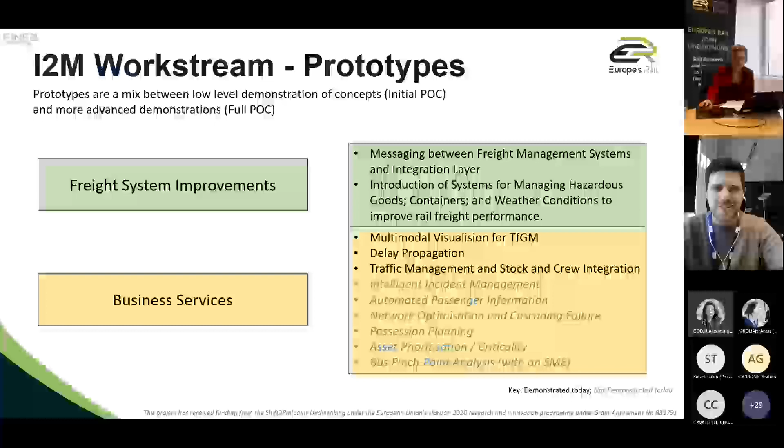So both of these are really focused on how we do reduce energy consumption inside the rail sector. As I said, on the next slide we have the list of prototypes. Those at the top are the ones that the experts will take you through once I finish talking, so I won't go into any detail on those. But the sections below in italics are ones we won't have time to discuss today, but there should be lots of information appearing on our website fairly soon, and there may be other opportunities for us to talk through them. It's worth saying that some of them are also very interesting.

The very bottom one was looking at optimizing the bus network so that passengers who rely on public transport to get to railway hubs can have a quicker and more reliable journey. That's been working with an SME, a small business here in the UK, utilising their expertise with those of Thales.

Other ones have been looking at how we optimize possession planning so that we reduce the amount of downtime. That has a big effect on freight operations and ensures that there's more available train paths for freight carriers. So there's lots of information available, and I hope to get more of that out to those people listening today.

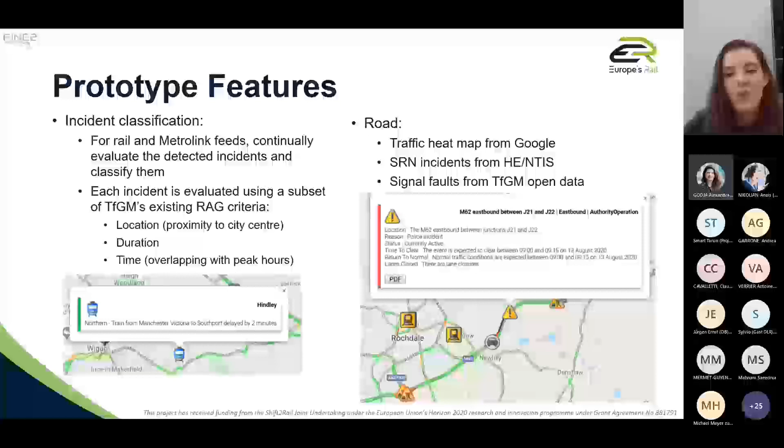For the road network, we created a traffic heat map, pulling in data from Highways England and NTIS, which is the UK road network, and we got some signal faults from Transport for Greater Manchester's Open Data API.

So for the rail, we monitored train departures from our Thales-provided Darwin service, so we could identify which trains were running late and then create train-specific incidents. We could also pull in some of the tram Manchester Metrolink data using Transport for Greater Manchester's existing open data API, so we could identify if there were no arrivals or departures for a tram stop, if the trams were running late above a certain threshold, and if the statuses of the passenger information displays were not updating.

Great, thanks. If we could go on to the next slide.

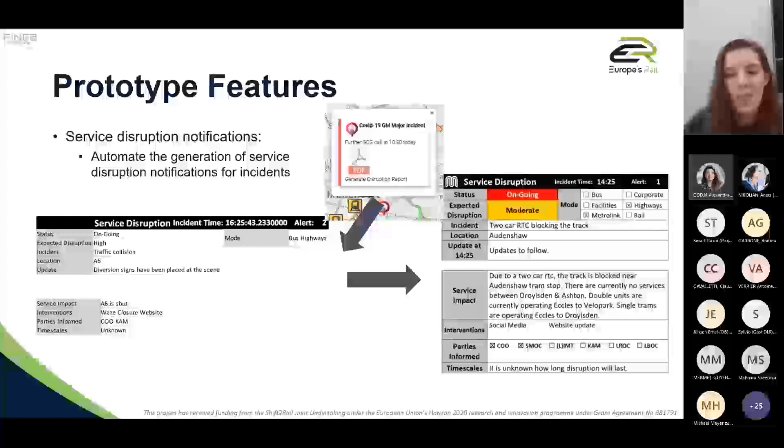We also added some features to further along incidents. So to notify wider management in Transport for Greater Manchester, we created a PDF in their general procedure format for when an incident's ongoing. If the system detected an incident, a user could then quickly generate and raise information and send that on to a wider audience. Here's an example of what our PDF looked like during the proof of concept.

Another apprentice also streamlined the data gathered from the APIs, so it was a lot quicker and faster to get the information, and added events to the feed. So, for example, if a big festival or a big football match was happening, that information could be added and certain roads blocked off or information sent out regarding those events.

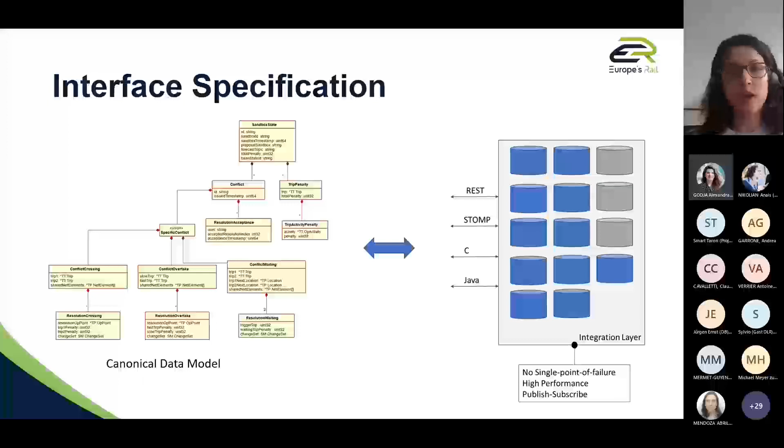A little background on this work: it's essentially joint work or joint activity between the partners. Freight railways often suffer from unpredicted disturbances, which may be caused, for example, by extreme weather conditions. As a result, to control the impact of these disturbances, temporary speed restrictions are put into effect. Currently this process is done manually, resulting in speed restrictions being effective in larger areas or for longer durations than actually needed. Therefore, one of the modules developed in the Fine2 project, the prototype by Thales, dealt with deciding what temporary speed restrictions should really be put in place, and for what duration. Using near-future weather forecasts, these temporary speed restrictions and the area they covered were bound to a shorter duration than what would have been decided manually.

But that's not the end. We need to integrate this information into the forecast calculation to provide a more detailed forecast to the people who will actually use it. This is the subject of the prototype done by Siemens for conflict detection and resolution. As soon as this forecast is available, we need to inform the freight users of the system, or freight management systems, because this would impact their operations significantly, in terms of planning terminal operations, informing customers, and so on.

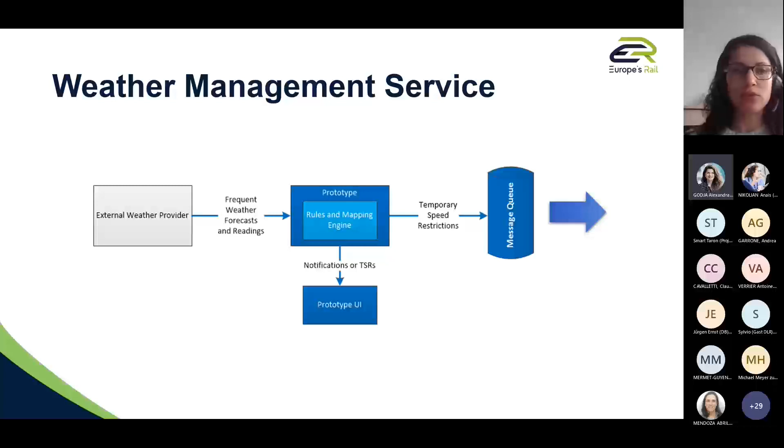Then the conflict management service carries out the conflict detection and resolution and calculates the forecast based on the information it receives. An important feature is that multiple operators can work simultaneously on the same master timetable, concurrently modifying their own small parts of the network to produce a global solution. There could also be a decision support system integrated as an additional player, either alongside a user or operator, or as a master branch. Once the master timetable is decided, it is communicated to the integration layer.

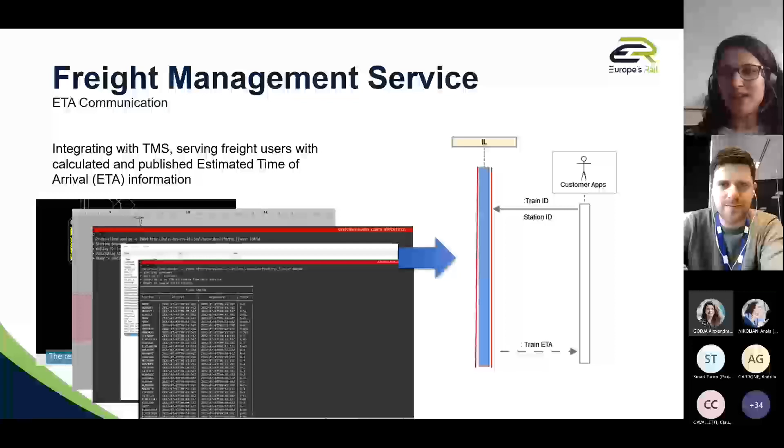So this was basically a very brief, general presentation of the different modules that were developed, and a description of the application programming interface for freight management and conflict detection and resolution integration, and how we can use that to minimize the impact of extreme weather conditions on train operations. This was the presentation, and I would like to thank you very much.

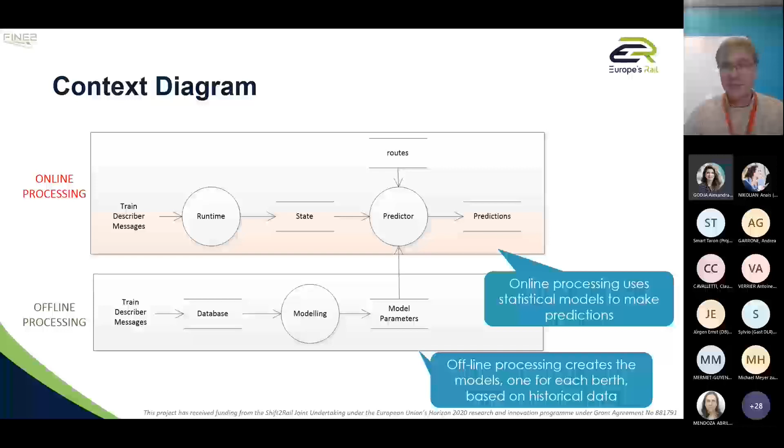Now, thank you very much - context diagram, yes. So we have two parts of our work. We have an offline processing algorithm that takes data from the train describers and computes statistical models for the length of time across each berth. And then we have an online processing part that makes the predictions happen in real time. Next slide, please.

We used something called a generalized linear model, which is a regression technique that uses explanatory variables to control the model parameters, so you can take into account the time of day and the occupancy of the forward berth in making your model.

In order to choose between models, we use something called the Akaike information criterion. We generated lots of candidate models and used the AIC to choose the most appropriate one. It selects a model with the right amount of parameters: if you have a lot of data for a particular berth, you can have a model with lots of parameters; if you haven't got so much data, it's better to have fewer parameters. So you balance the size of the model compared with the size of the data.

That's a method that has roots in information theory. It's quite a deep model.

So what does our model currently know and not know? It currently knows how the speed of a train depends on the signals last seen, and it knows the time of day. Our model doesn't yet know what the schedule is, and that's important because the schedule can be a major driver of the performance behavior of trains on a network.

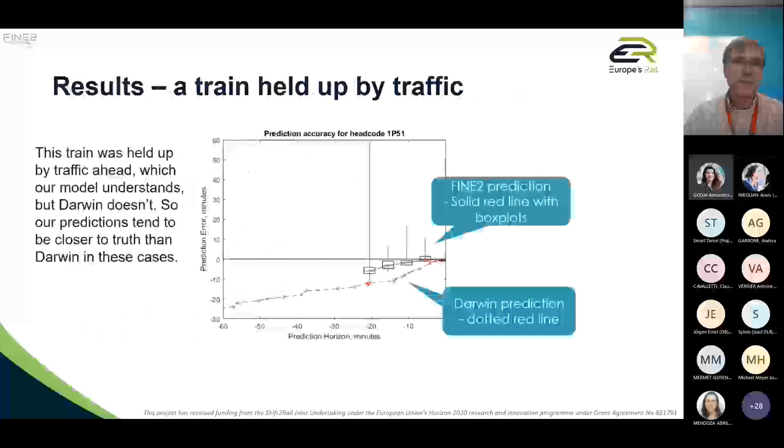So this is an example of our results. On the x-axis we see the prediction horizon in minutes, and on the y-axis we see what the error was at that particular prediction point. The prediction horizon has 0 on the right-hand side because that's when the train got to its destination, and -60 on the left-hand side means you're predicting an hour in advance.

This particular example is for a train on a bad day - clearly that was our interest, finding bad days in the network. This train has been held up by traffic, quite a few trains are bunched up, and our models know how that works. They know that when trains are bunched up ahead of you, the trains won't be able to keep up at their normal speed, so the model takes that into account and gives quite a good prediction.

The FINE2 predictions are the ones in boxes. You can see our first prediction is at 20 minutes before the train gets to its destination, and we converge on the true time from there. The existing Darwin algorithms don't do quite so well because they're not designed to take the interactions between trains into account.

What they do take into account is the schedule. So in a lot of cases, Darwin has an advantage on us, but when the rail network is congested, our FINE2 prediction does a little better - there we have a 6-7 minute improvement in accuracy, and that's worth having.

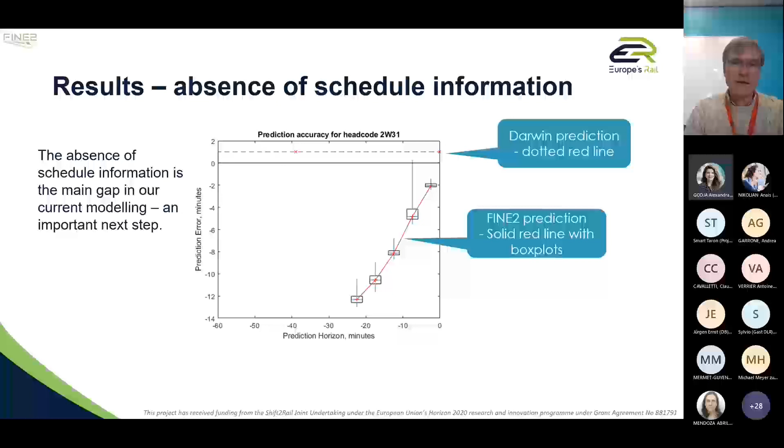So we have conclusions. The results are quite good - we've succeeded in our aim of making a prediction that's better than Darwin when the trains are bunched up. And it's implemented in a way that we can scale it up to full-size operation, because we built on something we've used at Thales before, called a discrete event simulation architecture that can be distributed across multiple machines. So implementation at scale is not really a problem.

And Thales GTS plan to carry on. We've done a proof of concept, and the team now plans to refine the system and begin the process of incorporating that into day-to-day operation with Darwin. If it's successful, that will improve the quality of data for the rail network and for digital planning tools that are also used from the network.

That's all I have. Thank you very much, and I look forward to hearing any questions later on.

Thank you, Steve. I think you actually trimmed a minute off Marnham then, so the gauntlet has been laid. So next up, it is Claudio and Andrea, who represent Hitachi Rail STS over in Italy. I can see one of you has appeared. I think it's Andrea. Yep. So Andrea, I'll hand the baton to you.

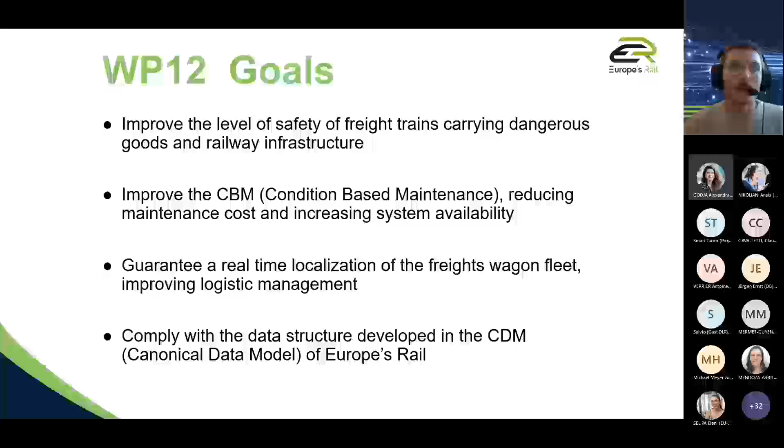FINE2 work package 12 is concerned with developing a prototype for the management of dangerous goods in the railway. The main goals are improving the safety level of freight trains while transporting dangerous goods, reducing maintenance costs and increasing system availability by introducing condition-based maintenance interventions, improving freight trains logistic management, and exploiting the data structure developed in the canonical data model of Europe's Rail.

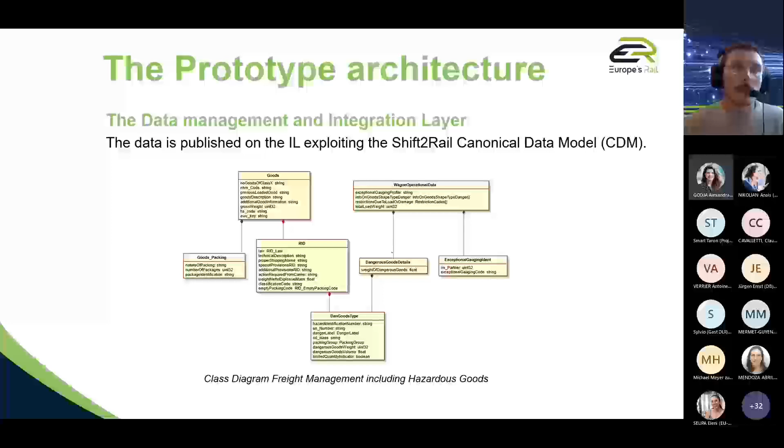The data is published on the integration layer, exploiting the Shift2Rail canonical data model. For this prototype, we developed an integration layer able to manage both CDM STS messages and CDM Shift2Rail messages, which facilitates asynchronous communication among the microservices.

This is the HMI, which is composed of four main sections. The one in the top left shows all alarms received together with a timestamp and alarm type. The one in the top right shows all observations received by the master control unit and acquired by the sensors. These sections highlight possible anomalies with different colors and allow the user to click on a specific observation and see the message in the Shift2Rail CDM format. The third section, in the bottom left corner, shows the train's path in real time from the origin station to the destination station. Finally, the last section shows the timetable graph highlighting the scheduled and actual timetable.

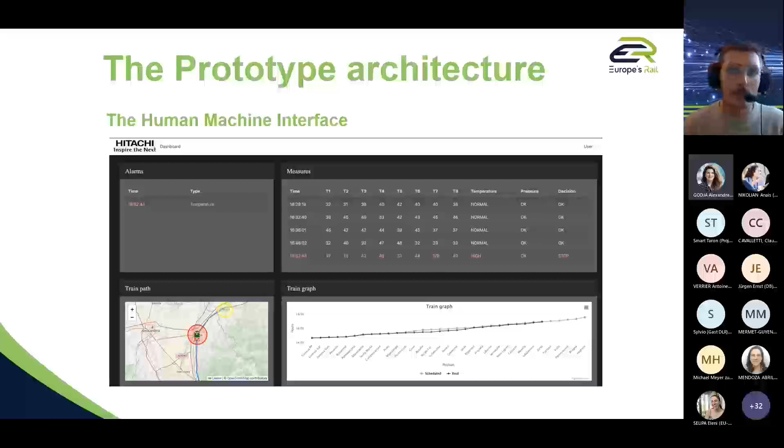The following slides show the main use cases that prove how the objectives have been achieved. This is the first use case in which an axle box temperature alarm arises. The onboard control unit sends the alarm to the TMS, which sends a message to the train ordering it to stop in order to avoid possible damage or derailment. This use case demonstrates how the use of the prototype can improve the safety level of freight trains carrying dangerous goods.

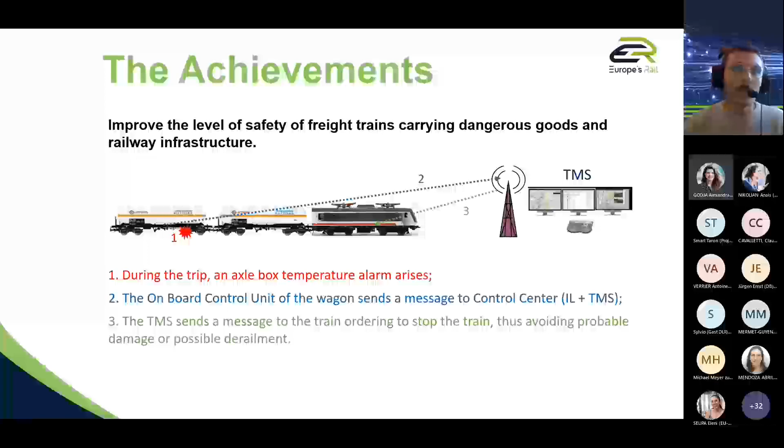For what concerns the objective related to improving logistic management, the developed prototype can guarantee the continuous transmission of the GPS signal of each wagon, providing real-time localization of the freight wagon fleet.

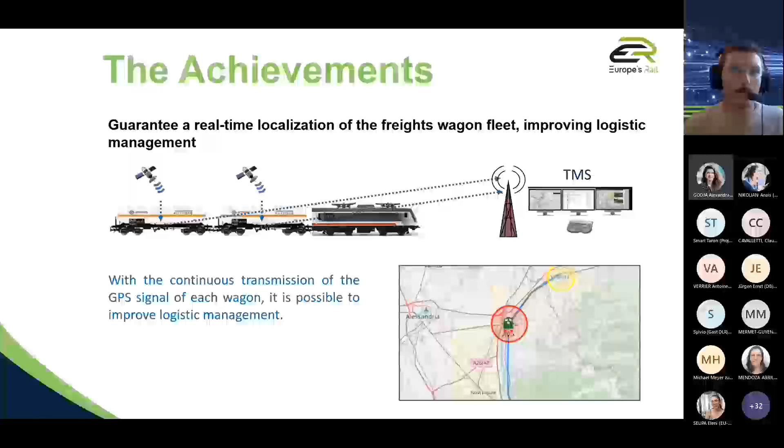Finally, we are compliant with the data structure developed in the canonical data model of Europe's Rail. As already said, we developed an integration layer that can manage both CDM STS and CDM Shift2Rail messages, and can easily manage the communication among the subsystems.

To conclude, the prototype developed within WP12 is able to minimize the risk of accidents during freight train transportation. It can also monitor different parameters, for example axle box temperature, making it possible to introduce condition-based maintenance interventions. It also provides GPS localization, useful for managing freight train logistics. It publishes data on the integration layer, which ensures future compatibility with other partners.

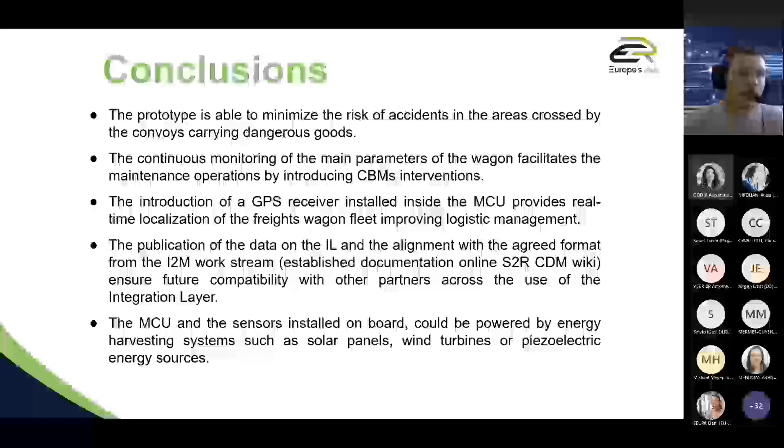An important energy saving aspect is that the power consumption of the devices composing the prototype, the master control unit and the sensors, is relatively low, meaning they could be powered by energy harvesting systems such as solar panels or piezoelectric energy sources. This is a quite good aspect for energy saving.

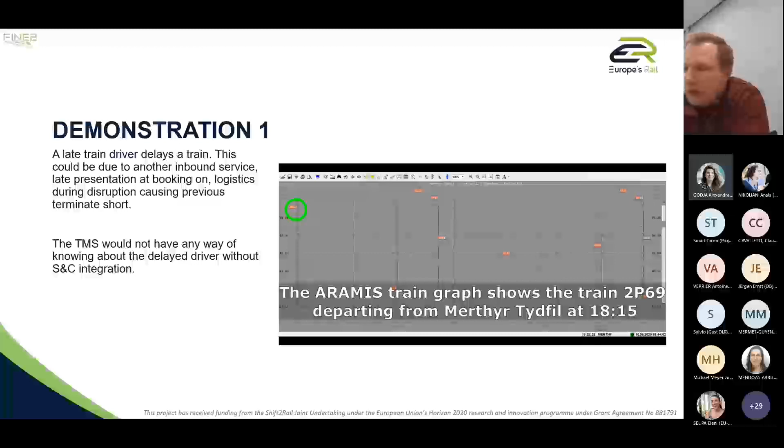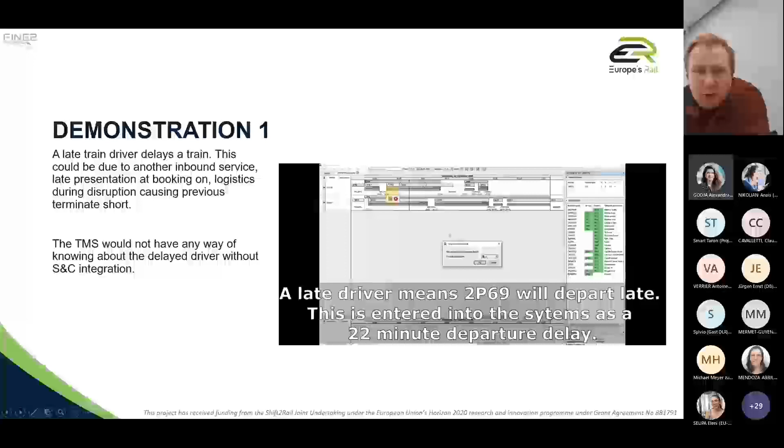If I can ask you to click start on the video, we really will be testing the technology now. Here we go, I think it's going. This is the first scenario, which is essentially entirely isolated to the traffic management system to begin with. We have a crew constraint, and the TM system would have no way of knowing about this. So here we can see how IVU can identify this constraint and update traffic management based on the shared data model, which is train forecasting in simplest terms. Hopefully you're going to see all the magic happen in front of you. I apologize if that's not quite big enough.

This will show how distributed tools can work together.

Providing a common vision, you can see here that Aramis has received an update. There it is.

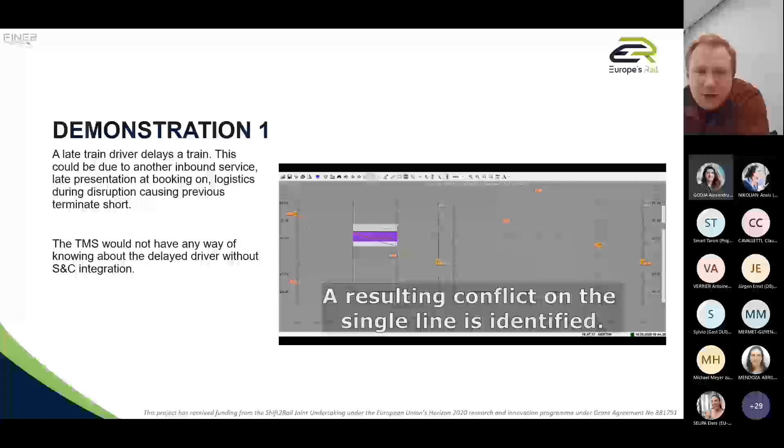And then the traffic management system can act to do what a traffic management system needs to do and resolve the conflict. That information can be reflected back into IVU, and the stock and crew can reforecast or reschedule as required based on the optimal solution.

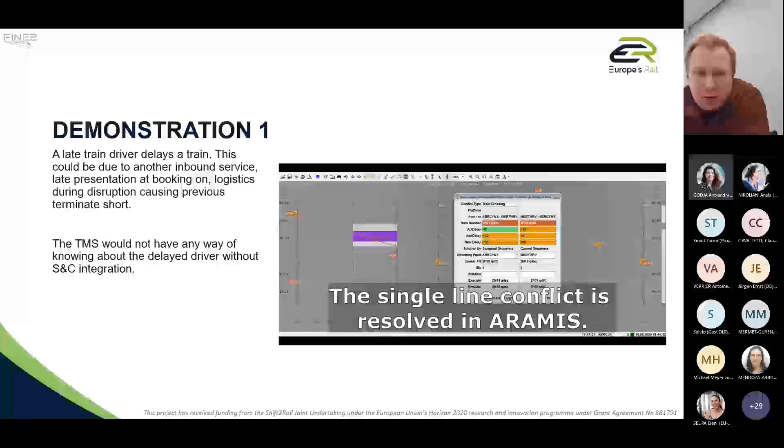This is also quite a good advert for our traffic management system. As you can see here, the smaller purple boxes show basically a progressively reducing conflict, based on the operational tolerances built into the network.

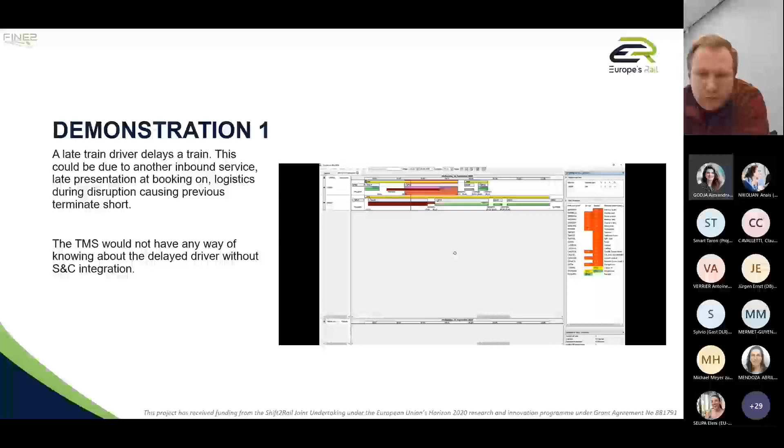Spot the theme: message passing back and forth.

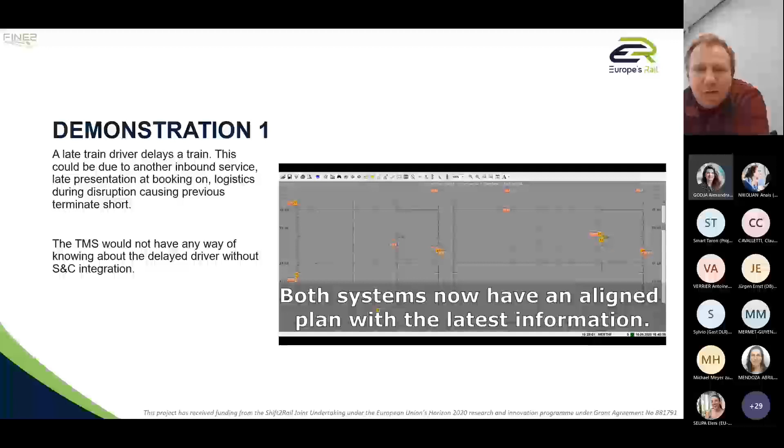You can see now that we've resolved the situation in both systems, and each system has only needed knowledge derived from its own world. So you can protect those things that need to remain proprietary, without exchanging masses of data that's not relevant to other systems. If we go to the next slide, please.

If you could click play again - a very similar model here. In this case, the constraint is derived from the trackside infrastructure as opposed to the stock and crew.

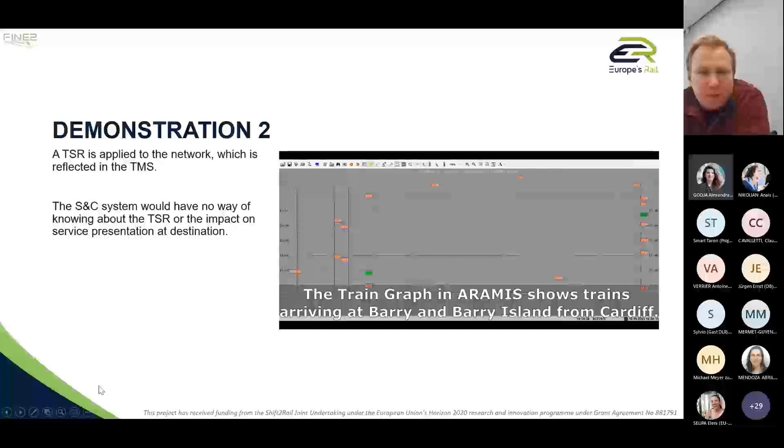Using this common forecasting model, we can supply this information to the stock and crew system. The stock and crew system can use that to identify problems in its ability to resource that plan.

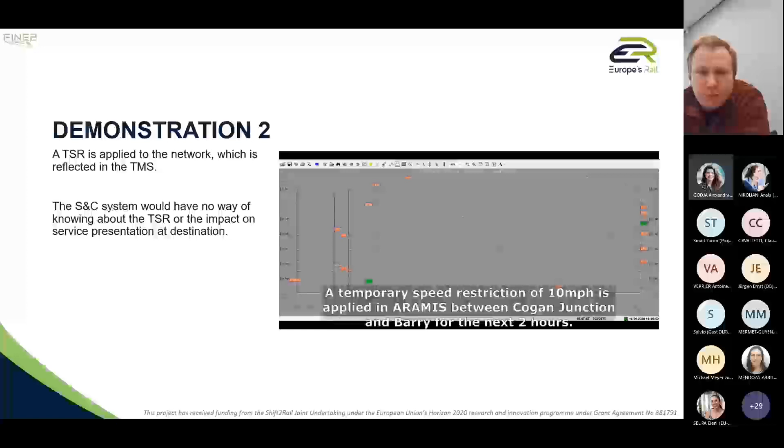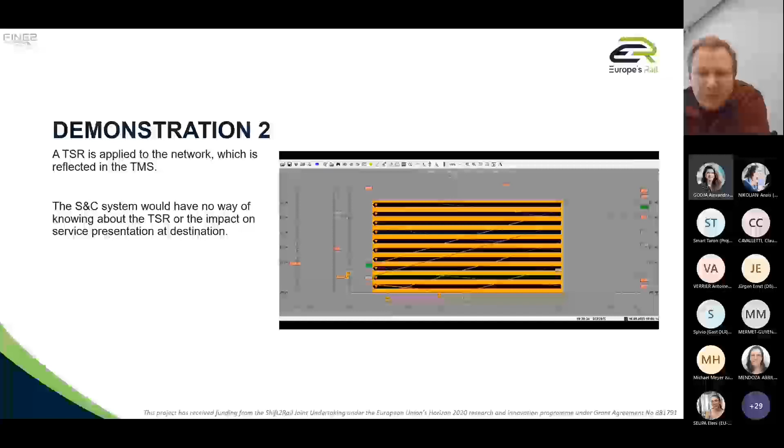One of the nice things about this example is we can see the way this can scale up from individual train-related events to something derived from a trackside infrastructure constraint - for instance, knocking out a temporary speed restriction that affects multiple trains - and how that can quickly be conveyed to downstream systems to which that information is relevant.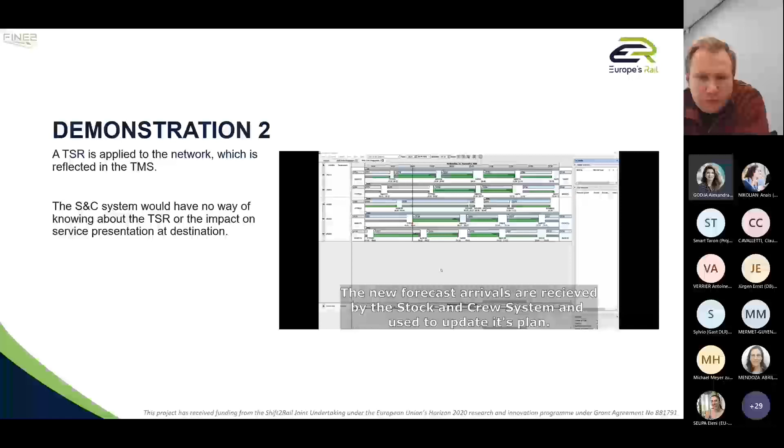You can see pretty quickly what a catastrophic effect that can have, and it allows the operator to essentially start responding to events at scale, as opposed to having to manage this sequentially.

I think that might be the end of that video, so if we move on to the next slide. It's the same slide - there we go, magic. Yep, if I could ask you to click play on that one.

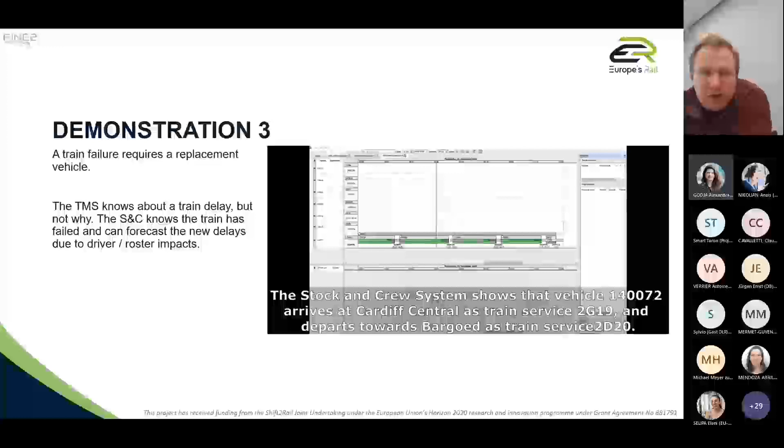This is where we've got inputs into both systems happening at the same time. The traffic management system will observe a failed train, the stock and crew system will observe a failed train, and those different effects need to be integrated into a coherent picture.

This allows the systems to swap information based on that common understanding provided by forecasting, to understand the impact on the train plan.

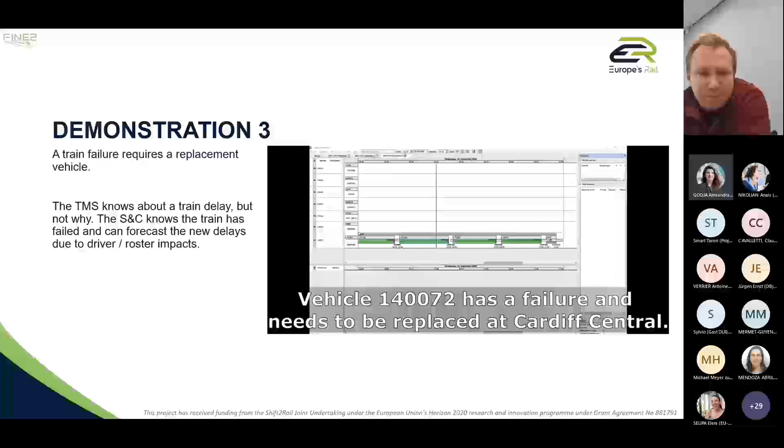One of the nice things highlighted there is very application-specific constraints being applied - so a deployment restriction in the stock and crew terminology, and in terms of how it responds to that, is not particularly relevant to the traffic management system. It doesn't need to see the workings; it only needs to see the outcomes.

So we can see how we can make interoperability commercially viable, allowing people to protect their own IPR and the unique capabilities that different suppliers can bring, while still working together collaboratively to deliver the railway.

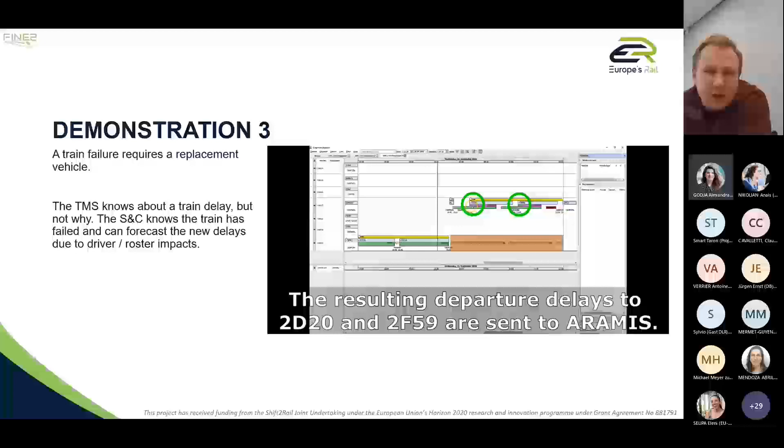The traffic management system would have really no way of knowing that a spare vehicle was available and switched off in a siding nearby, whereas this is available in the stock and crew system.

So we can see how the train plan can be updated based on entirely new vehicles, which is not within the scope of the service plan.

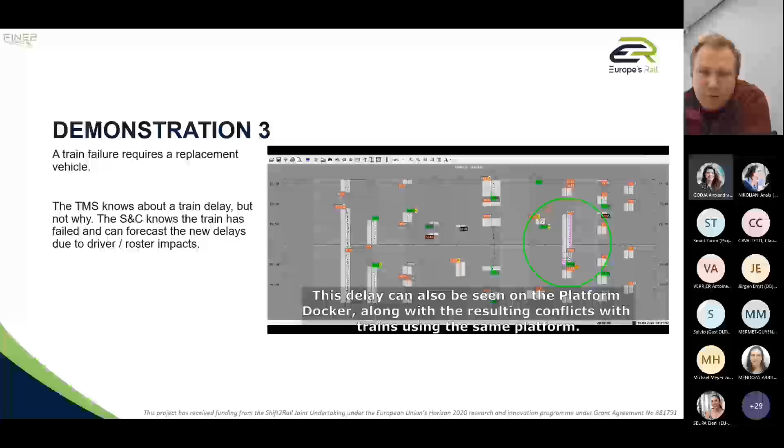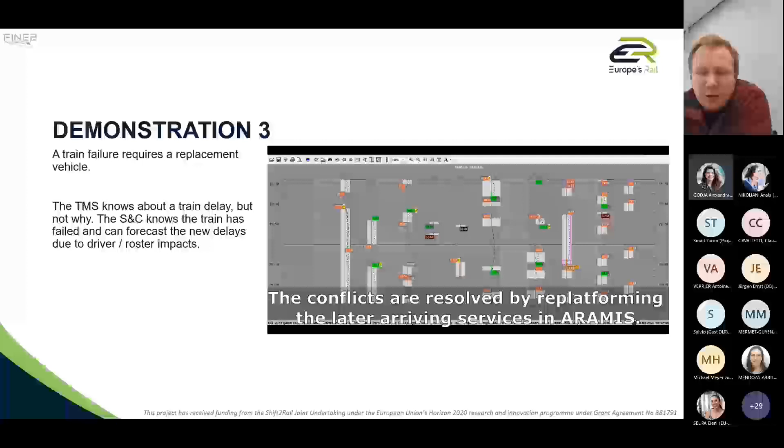We can see now how the introduction of that new vehicle creates demands on the track infrastructure in terms of bringing it into service, and the traffic management system can now usefully resolve that.

I think that's the conclusion of that video, so if you'd like to go to the final slide.

Hopefully you've enjoyed those demonstrations. We've shown how common messaging can integrate disparate systems efficiently, using simple and common APIs as the most efficient way of achieving this. Although we did not use the CDM model, this clearly shows its applicability.

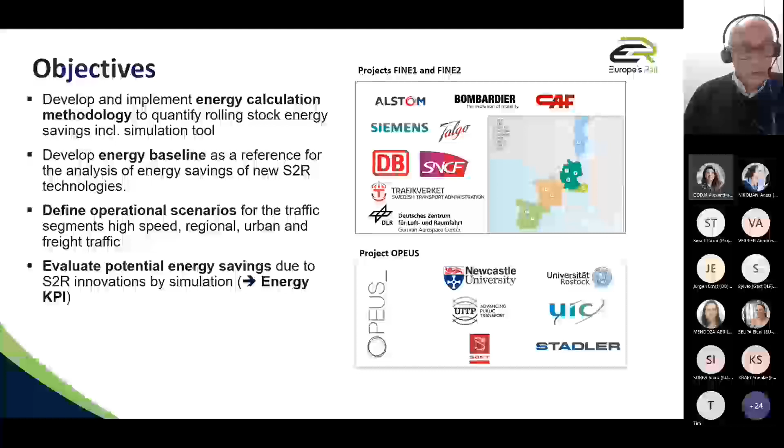The second objective is to set an energy baseline as a reference for all system platform demonstrators in the high speed, regional, urban, and freight segments. The third objective is for every SPD to define operational scenarios to calculate the energy KPIs. Main energy KPIs are train energy consumption per kilometer, and for passenger trains, energy consumption per kilometer passenger, and for freight trains, energy consumption per kilometer and tons. The fourth objective is then, by injecting the improved characteristics of the product demonstrators of Shift2Rail into OPEUS, to calculate the energy saving versus the reference baseline.

Next slide, please. I will present the energy calculation and simulation methodology. Then Jürgen will present our estimation of energy savings due to Shift2Rail innovation. Then Sylvio will give a view on innovative solutions to save HVAC energy in BEMU. HVAC is heating, ventilation, and air conditioning. BEMU is a battery electrical multiple unit. And Jürgen will conclude with an outlook on additional savings foreseen in EU Rail flagship projects.

Next slide, please. So the methodology to compare energy saving is to define for every SPD an equal service profile, and define the classic traction system, for instance IGBT converter and induction motor, versus the future technologies, for instance SiC converter and high-speed axial flux motor, and by simulation with OPEUS, quantify the savings, assuming of course that the technical improvements reported by the TDs are applied.

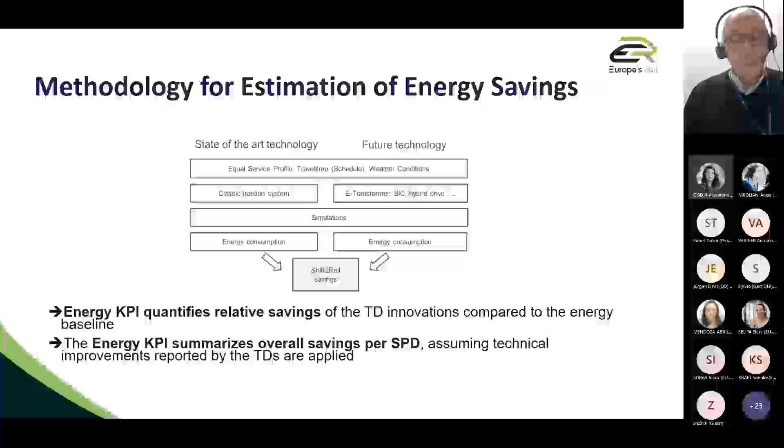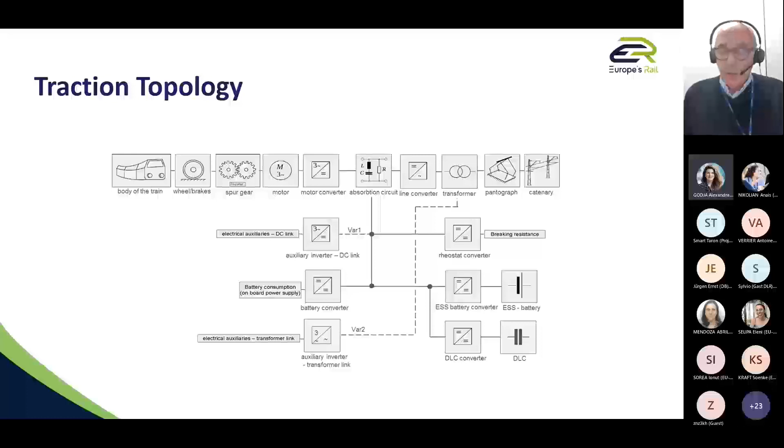The traction topology for EMUs is globally defined for the full train and divided into power subsystems or power components, with a central part shown here as the absorption circuit. Another naming for this part is DC link or DC bus. On this DC link, the main loads are traction equipment, auxiliaries, and rheostat for braking energy dissipation. The source here is catenary, and in this topology we have an energy storage system with battery or supercapacitor. For a demand in power at wheel and auxiliaries, OPEUS tool calculates the energy flows between these elements. Energy flow is the power, in fact.

All that I have explained before is implemented in OPEUS tool. Track data, train data, and operation data are entered with an Excel interface, and the output, the results of the simulation, are also in Excel format. The simulation structure is implemented in MATLAB and Simulink, as well as the component model library.

In FINE 2, we calculate the global energy saving at train level with the new technologies developed in Shift2Rail. Many of these technologies and their implementation are confidential, as required by the partners. That is why I want to illustrate with some concrete examples the potential for energy savings.

First, energy consumption of rolling stock can be divided into three main parts. The first is energy at wheels, which makes the train moving, mainly coming from resistance to motion forces. The second is energy losses in all the power subsystems or power components. And the third is the energy consumed by auxiliaries. There are two types of auxiliary load: medium voltage auxiliaries and low voltage auxiliaries. The main consumer loads are air compressors for brakes, HVAC, and cooling devices for traction equipment.

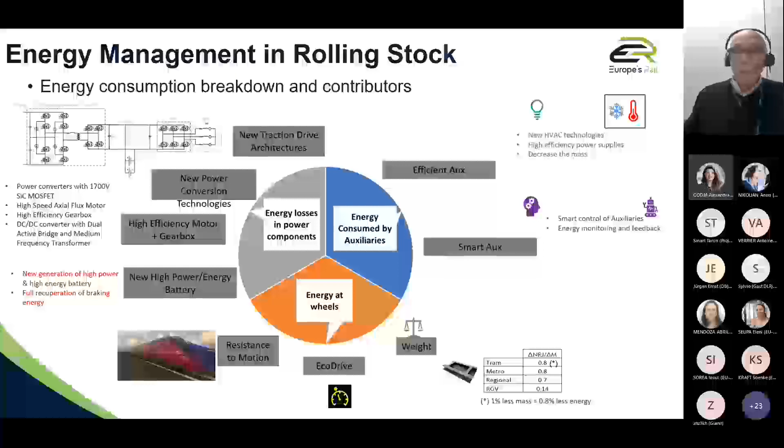So this is just an overview. Now I will let Jürgen go on with energy saving due to Shift2Rail innovation. Please, Jürgen.

Hello everybody, my name is Jürgen Ernst. I'm an electrical engineer and I've been working for Deutsche Bahn for more than 25 years. My main subject is the overall railway system, so I'm not an expert in a special subsystem - I look at the overall railway system from an operator and infrastructure manager view.

So now we start with energy savings due to Shift2Rail innovations. As Michelle already explained, there are four measures to reduce energy. The first is reducing energy losses of the traction chain. The second is reduced mass. The third is improved control strategy and operation. And last but not least, improved aerodynamics.

And now here you see technical demonstrators developed in Shift2Rail and how they contribute to energy saving. These first ones in this slide are only demonstrators for passenger trains.

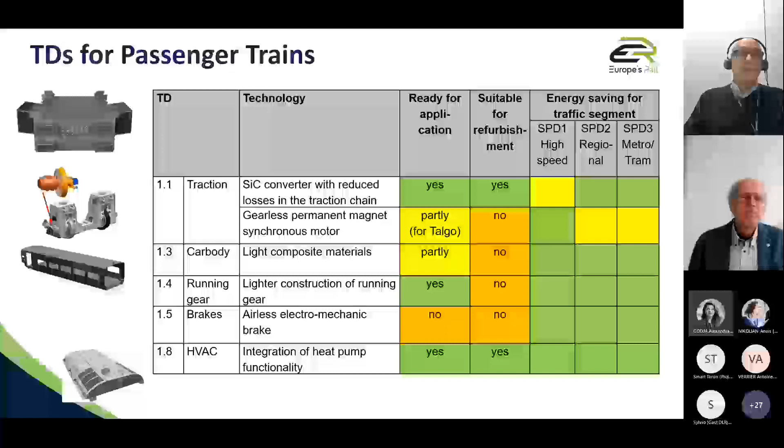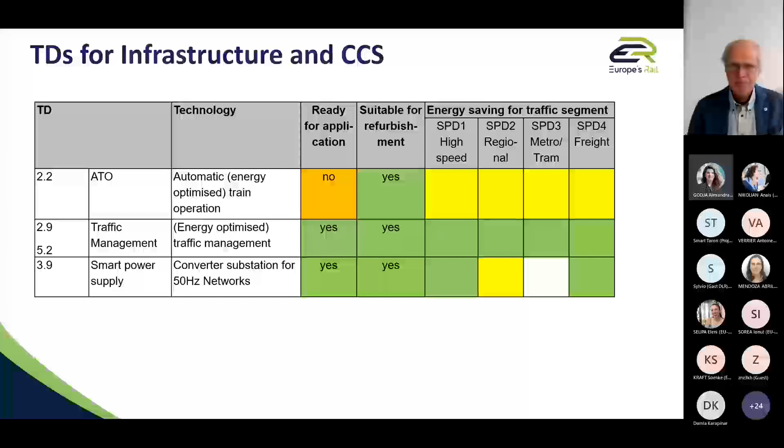And now to the next slide.

And for freight trains, connected driver systems has a low impact, as does the silicon carbide converter. But you see the extended market wagon with improved aerodynamics and the optimized container sequence has a huge impact on energy saving. So it's really important to look at these innovations.

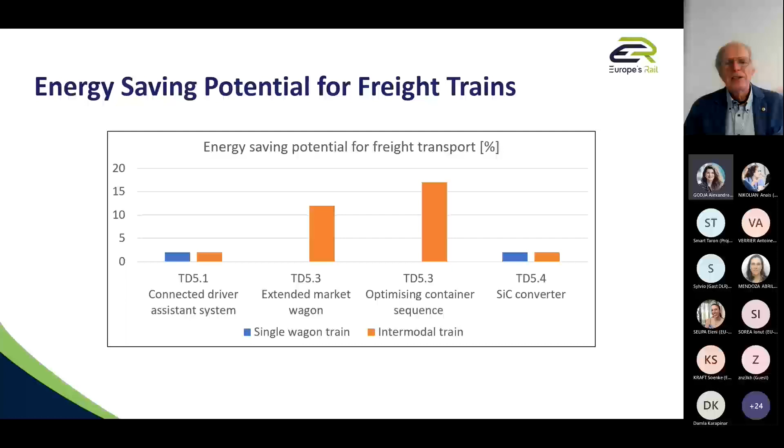Now I come to the conclusions. You've learned that several energy-saving technologies are developed in Shift2Rail, and the technologies suitable for refurbishment can reduce short-term energy consumption by 4 to 20%, depending on the traffic segment. These are, for example, the silicon carbide converter, the connected driver assistance system, ATO, and optimized container sequence.

And with new trains, the long-term energy consumption can be reduced by a further 4 to 30%. For some technologies, the energy saving potential still has to be estimated, for example for substations with converters. So thank you very much for your interest.

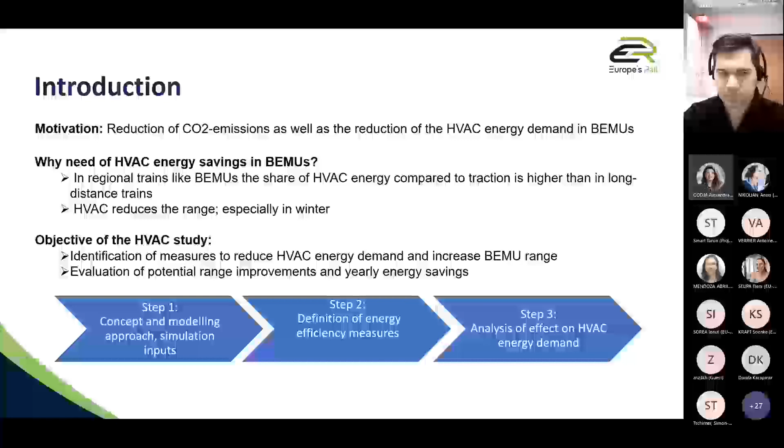Next slide, please. The overall concept is to combine the OPEUS tool, already shown for the longitudinal dynamics, with the DLR model for the thermodynamics of a car body. The approach is iterative: results from one tool are used as inputs for the other, and so on. The whole procedure is based on the norm EN 50591.

Next slide, please. The car body model is described as a regional battery electric multiple unit car body through various wall and window elements, passenger model, etc. This model has been validated in Fine2 task 4.2. The results are shown in deliverable 4.2.

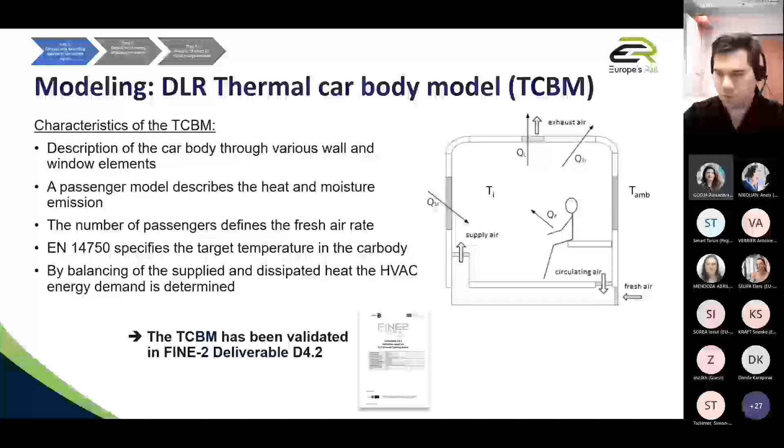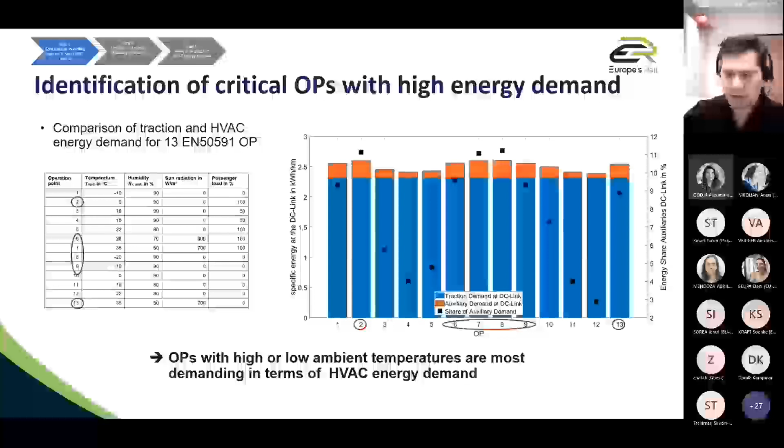Next slide, please. The BEMU baseline is defined with the heat pump, because it's expected that all future BEMUs will have heat pumps instead of conventional HVAC systems. The study evaluates the higher demand of a conventional solution with resistance heating to demonstrate why heat pumps are regarded as state-of-the-art for all future BEMUs.

Next slide, please. The measures and main concepts to reduce energy demand are: measure 1, heat storage, where the heating energy demand is provided by a thermal storage instead of using electric energy from the battery. Measure 2 is the improvement of insulation, which lowers the heat losses through the car body walls. And last but not least, measure 3, the reduction of the HVAC energy demand by utilization of the full temperature range of the EN 14750.

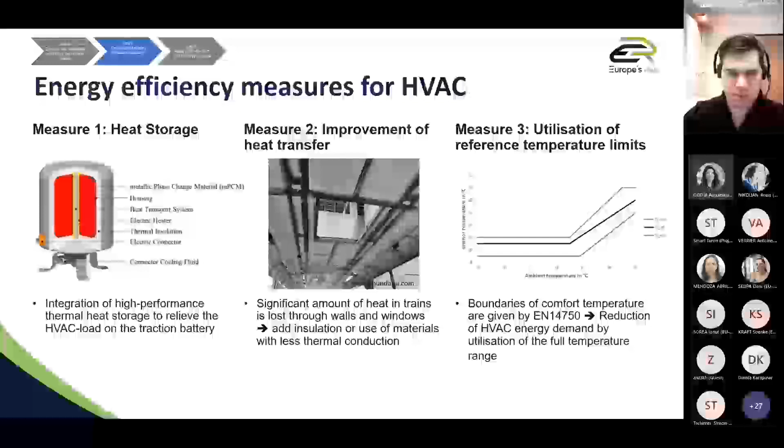And now we want to come to results. Yes, the main results in terms of additional range for each operation point are...

At first, the heat storage is very effective in heating operation points, but ineffective in cooling operation points. The heat storage provides a maximum of more than 9% range increase in some operation points.

The second result is that the improved heat transfer and utilization of full temperature range are effective in heating and cooling operation points. For measure 2, maximum range increase is slightly more than 2.5%, and for measure 3, the maximum range increase is slightly more than 1.7%.

To compare and benchmark the different measures, the yearly energy savings compared to the BEMU baseline with heat pump have been calculated for climate zone 2, according again to EN 50591. Next slide.

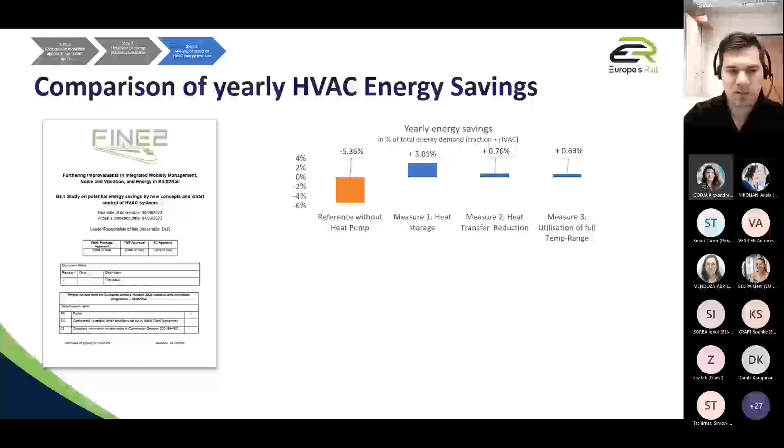For the other measures, the yearly energy demand can be reduced by 3% with measure 1, the heat storage, and by 0.6% to 0.7% with measure 2, the heat transfer, and measure 3, the utilization of a full temperature range.

Finally, it should also be mentioned that the implementation of measure 3, the utilization of a full temperature range, requires lower effort than the other measures. Therefore, in principle, measure 3 could also be implemented in already running vehicles, while the other two measures are preferably for new vehicles.

All the results are documented in the FINE 2 deliverable D4.3, which will also be publicly available through the official project website. Thanks, and thank you for your attention.

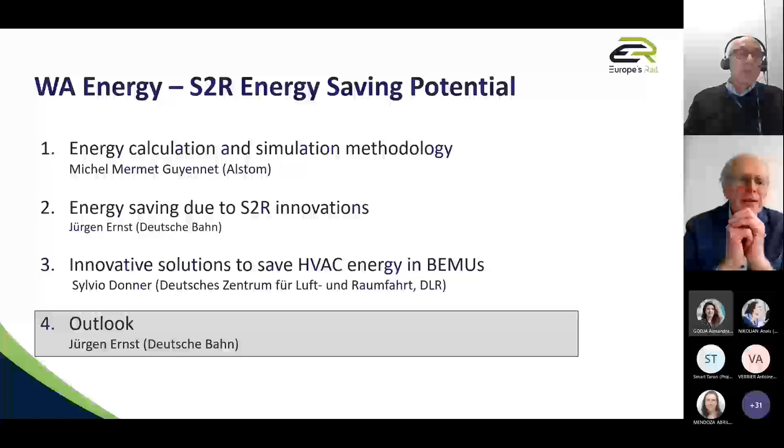Yeah, the conclusion and further steps here. So you learned several energy-saving technologies, and Michel mentioned a simulation tool that was developed in Shift2Rail. It should be stated that this tool is public and can be used by everybody, so that helps to integrate it or to use it for all stakeholders there.

The technology suitable for refurbishment can reduce the short-term energy consumption by 4 to 20%, and railway undertakings and infrastructure managers should carry out a cost-benefit analysis to clarify whether refurbishment of existing trains is economical, for example to change the HVAC unit or to update the converter to the new technology.

Energy-saving technologies for new trains should be considered in the tenders of the railway undertakings, and certainly then they will be realized by industry. If they are not considered in the tenders, there might be the problem that industry is not going to realize these technologies because the saving is on the operator side here.

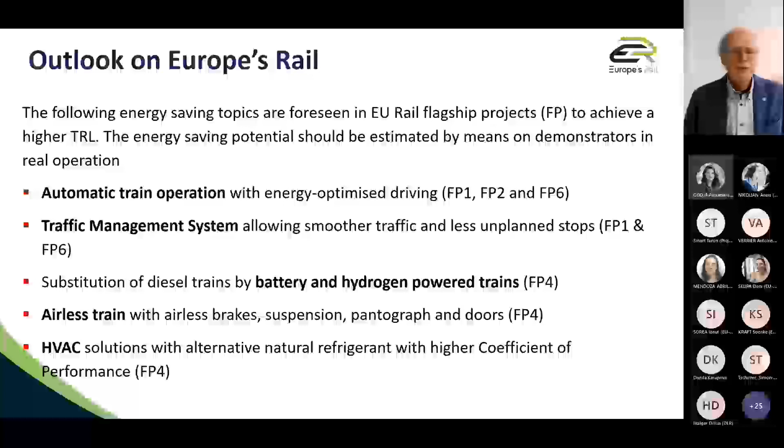And yeah, I'm happy that this was integrated into Europe's Rail, and we will go on to develop it with the same industry partners. But in addition, there will be a lot of other railway undertakings and infrastructure managers involved in these projects as well. So I think it's a good opportunity that they are going to apply these new technologies. Thank you very much for your interest.

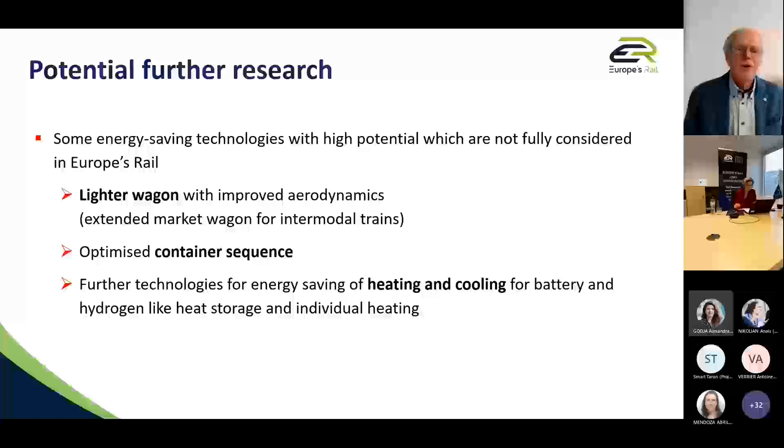Oh, I forgot, I have a further slide here. Not all these ideas that I mentioned before are covered in Europe's Rail. For example, the most important topic concerning freight, the lighter wagon with improved aerodynamics and the extended market wagon for intermodal trains, is not covered in Europe's Rail and still has to be figured out how it can be further developed. The second innovation, the optimized container sequence, is also not covered there. Further technologies, like the saving of heating and cooling for battery and hydrogen trains, as Sylvio already mentioned, are not covered by Europe's Rail up to now. So there is still potential for further research, but Europe's Rail has several calls, so perhaps we can integrate it into one further call. Now I thank you for your interest.

So, question. There were no questions asked during the presentation. So, are there some questions? No, I don't see any questions either.

Thank you very much to the speakers. I think these overview slides were very interesting and really summarized the situation clearly. We can see that there is significant potential for energy reduction already by implementing the Shift2Rail innovations into the European railway network. But of course, we know we can do more, and we should assess what are the most promising technologies in order to further improve the energy performance of the rail system, to make rail even more competitive compared to other modes of transport. The energy bill is a significant part of the costs for railway undertakings, so having better, more optimized energy usage and more energy efficient technologies are key for the sector.

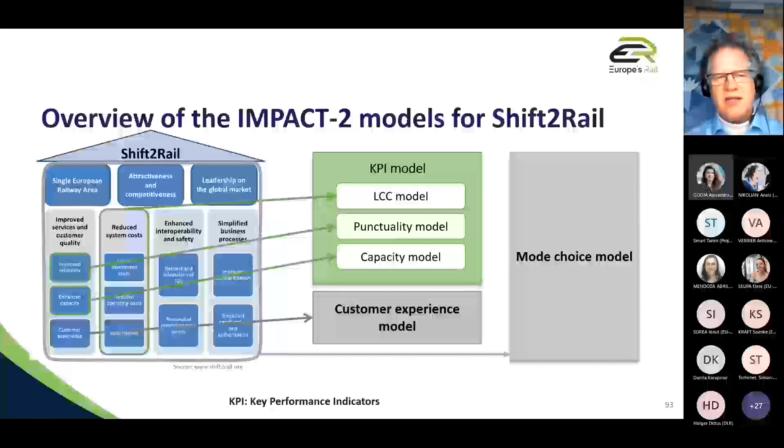We have a high-speed scenario, a regional scenario, a metro scenario, and the freight scenario. One of the speakers before, Jürgen, already mentioned SPD4 for the freight scenario and gave you some details into the other SPDs with respect to energy consumption.

Our approach was that we modeled simple baseline scenarios, which were quite generic. For a reason, we didn't take a specific European scenario, because they all have specific inputs from national rules, from history, and so on. So we designed something, I won't say on a white piece of paper, but we designed a very generic scenario and collected the data input for it.

Then we applied the Shift2Rail innovations for a future scenario and put the improvements coming from the different IPs onto these scenarios. Looks simple.

What we need to acquire is much more than 400 individual input data points and more than, I think, 200 improvement values. So we have very, very much data to collect, and we always need to ensure that it's in a certain sense compatible, or coherent, which was an interesting exercise.

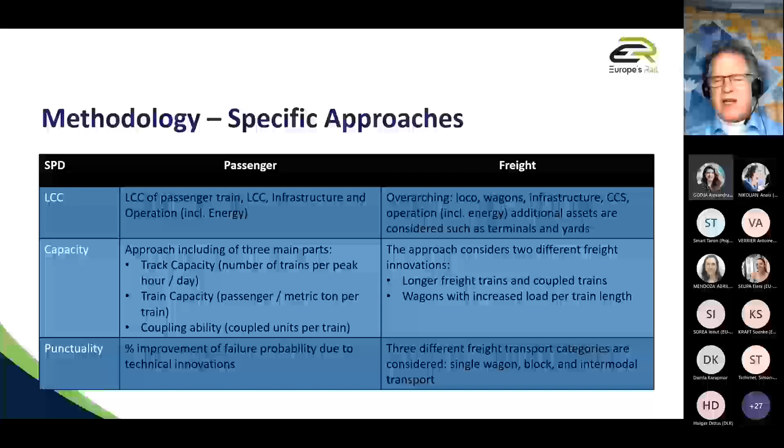We have the track capacity in number of trains per peak hour. If we have, for example, ATO and moving block, we can have one train more in the peak hour, which is already a lot. So if you increase the number of trains from 12 to 13, or from 15 to 16, it's a lot more passengers you can transport.

And there is a last, third bullet point. If the coupling procedures of the trains in the stations could be sped up, then we have more capacity because the waiting time in the station becomes shorter. So these three parameters involve very much the passenger capacity.

For the freight, it's again a little bit different because we assume that the train can change its shape, so becoming longer, becoming heavier. So we have wagons with increased load per wagon, train length, and simply longer trains.

For the punctuality, it looks very, very much similar. So again, the question is, what is the parameter about? It's about unpunctual trains, and we would like to reduce the number of these unpunctual trains by 50%. I won't go deeper into the details here, but we have a little bit more influence parameters for freight. So let's continue to the next slide.

So how did we do this? We took all these mathematics, we did all the parameters, and well, for someone working in the scientific field, this sounds a little bit like tables. And this is exactly what we did. We took, quite simply, Excel.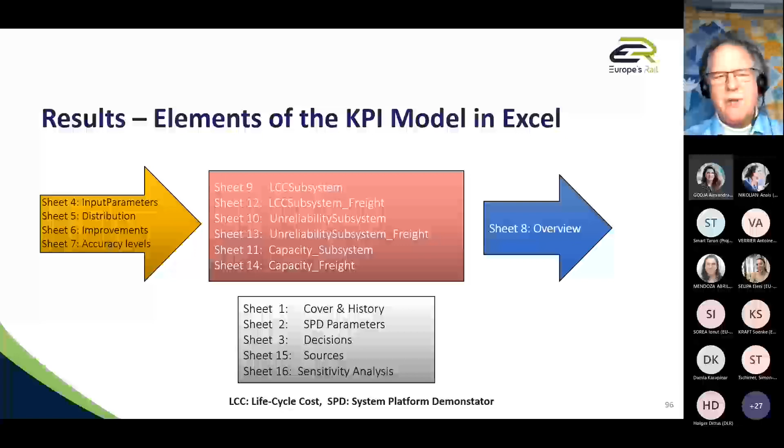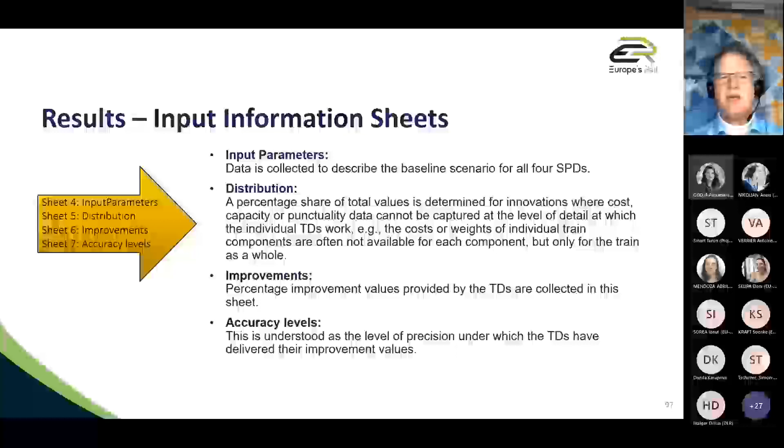So, okay, this is what we use on the input side. We have the input parameters - as I said, we describe the baseline scenarios for all 4 SPDs. We have the distributions, which are the percentage share of the total values, especially for the cost elements of the train, the elements of the CCS, and so on. We have the improvements, which is, in fact, the impact of the different technologies, the innovations coming from the TDs, and the accuracy levels, which is the level of accuracy we have, from expert estimation up to things like calculations, simulations, real operation.

So now on the next slide, we see how it looks like. Oh, sorry, again - I think I explained this, so we can forward to the next one already.

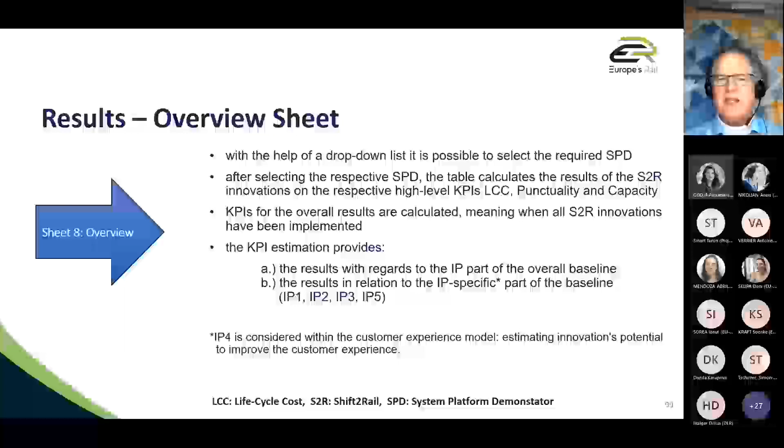So we have the overview sheet. The overview sheet is, let's say, the user interface. You have a drop-down menu where you can select which SPD you would like, and then you see a couple of fields and a couple of results coming out. They are shown in the context of the overall calculation, as well as the specific calculation for IPs 1, 2, 3, and 5. You may ask why IP4 is missing here. IP4 is looking on the customer experience, especially customer IT, and that's exactly what Antoine will present in the next presentation. So for IP1, 2, 3, and 5, I will give you the answer right now, and for IP4, Antoine will give you the answer in a minute.

Okay, let's go forward to the next slide. Exactly, here we have it. On the left-hand side you see the selection, so SPD1, the high-speed one, is selected here. And then you see the more complex table on the right-hand side.

The overall results are in the first green rectangle, for all the IPs. You see it's a 21% reduction for the LCC, 35 on punctuality, and 57.6 for the capacity. Maybe these are outdated values, so just take them as a sample. Then we see for the individual IPs, 1, 2, 3, and 5, directly on the right-hand side, the values for it. You see already at first glimpse that there's nothing for freight, which is not surprising as we speak about a passenger high-speed scenario.

And you see how the individual values are compiled. They're not simply added up, they're calculated by a more complex model. So there is a 35% increase in punctuality. It's not simply adding up 7%, 3%, and 18%, which would be much less than 35. So there is, in fact, a combination of both.

In the green rectangle below, the lower one, you see how the improvement compares against the baseline of the individual IP. For example, let's look at the command and control system, and you see the cost reduction is approximately 1% there, which is not that much related to the entire scenario. If you look below, with respect to the individual baseline for the signaling system, it's a cost reduction of 15%, which is still below the value expected by the program, but much higher than the overall value. So this is how it looks.

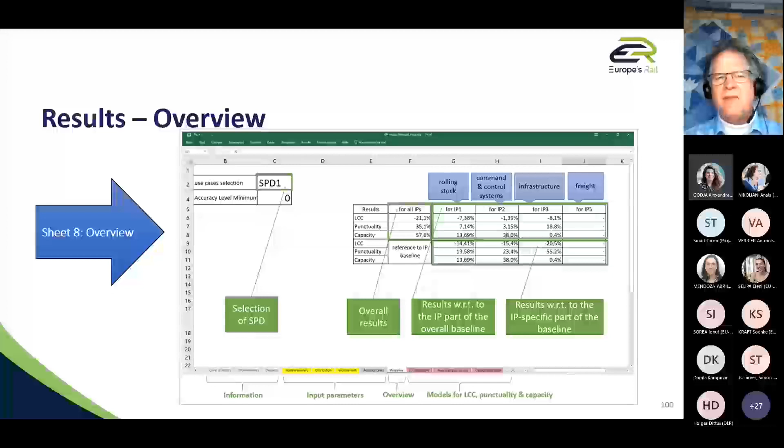Now you may ask me, how is the result at the end? This is what I showed you here, the overall values, the ones from the left-hand side, small green rectangle. If we look at the first SPD for high speed, we have a reduction of 20% in cost, a capacity increase of 58%, and a 35% increase in punctuality. Expected from the master plan initially was a 50% reduction of life cycle cost, a doubling of capacity, and improving punctuality by 50%. We have not fully reached these values, but we're in an order of magnitude which is not, let's say, by factors away from that.

If we look at the regional train, it looks a bit better. We have not a 50% reduction in cost, but almost 30%. The capacity is almost doubled. The punctuality is even better than the expected 50%, so we're at 55%.

If we look at the metro system, it's a very... oops, sorry, okay, let's continue with that. I don't need to go through each and every value, so it's okay. Let's go to the next slide.

If we look at the key effects, what has contributed here? For the trains, it's the functional open coupler, which allows a lot of reduction, especially in fleet size, as trains can couple freely among each other without taking care about which supplier is delivering them, and helps to smoothen operation. For punctuality, it's mainly the improvement of reliability of the traction system and the TCMS.

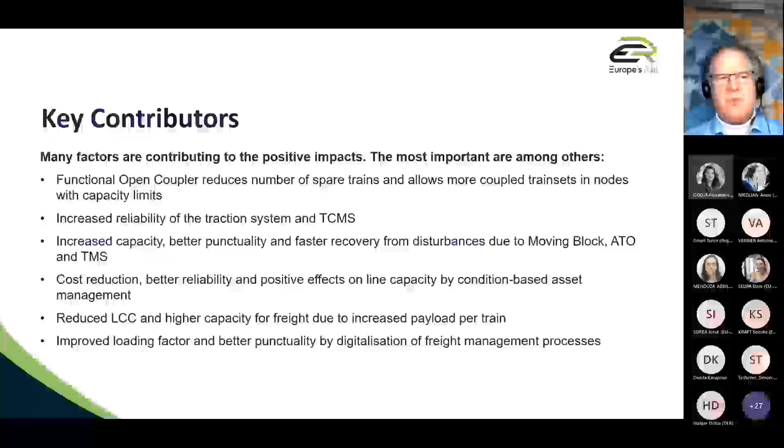So now I'm coming to the conclusion and perspective. We have developed a very powerful tool here to show the impact of innovations on Shift2Rail, coming from Shift2Rail on the rail system.

We have made an open model structure so we can adapt it to other assessments for other systems representing the railway system. Nevertheless, some priorities need to be adjusted. We were in a pre-Ukraine war phase, and therefore energy costs were understood as they were before. Now priorities will shift a little bit, and this is not reflected there. We are happy that in Europe's Rail, an even more refined, detailed approach for the KPIs will be used, so the model will definitely not apply one-to-one, but we are happy to input our knowledge and bring in all the developments from Impact 2 into Europe's Rail. Thank you very much.

So to make the model work, we have three different data sets. First of all, there's the input data, which gathers over 250 different barriers that impede customer experience. Then we have the distribution values that allow us to weight the input data and aggregate them into big packages so as to reduce the number of different variables.

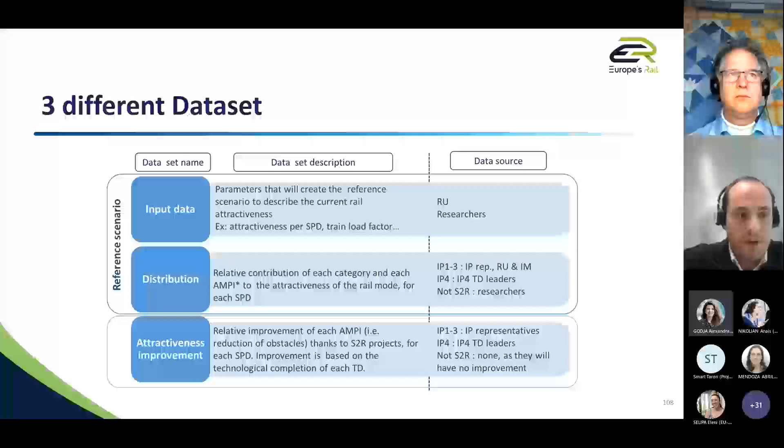And then there's the third data set, the attractiveness improvement. This data comes from the TD leaders, which we get year after year to assess the completion rate of Shift2Rail projects.

The input data are processed following several steps. First, we have the raw data coming from previous projects, such as NEAR2050, Go4Rail, Impact1, and some others. Then we make what we call elementary barriers - a kind of label we use for Impact2. Then we make groups of barriers, and these packages are called AMPI.

AMPI is a term you'll see if you read through the Impact2 project's deliverables - it stands for the big package of barriers. We have around 22 AMPIs in total, which allows us to handle the whole data set much more easily. In the model, there's always a direct connection between the different levels of grouping, so it's always easy to know what the AMPIs deal with in the real world - what it really means.

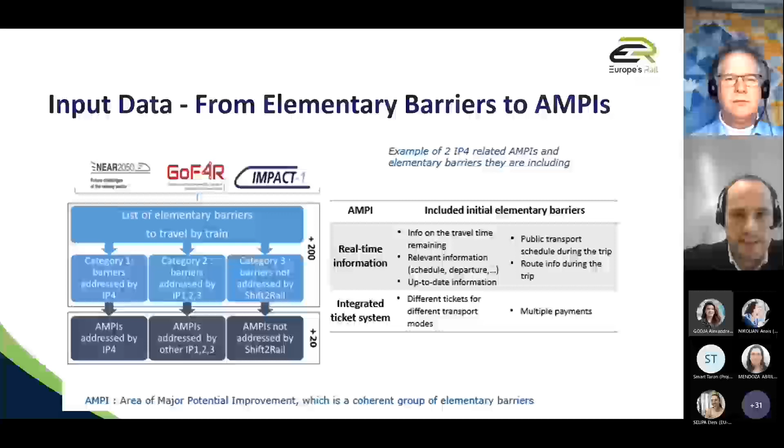On this slide you can see a summary of how the input values and the distribution data work together. On the left-hand side are the input values I've just spoken about. Then we made use of other projects and deliverables to weight these different inputs according to the customer's point of view.

We had to make a few more hypotheses, since the different data sets we work with sometimes don't focus on the same customer type - they may have different ages, backgrounds, cultures, and so on. So we had to draw the picture of a standardized customer so we could work with all these data sets across projects. We made use of Smarty, Find1, First Stations, and organized a workshop with the IP4 TD leaders to weight the different AMPIs related to IP4 accordingly.

Now I'm moving to the improvement values. Every year we go to the IP4 TD leaders and obtain from them the completion rate of their different TDs. This helps us get the improvement values of Shift2Rail and assess by how much, year on year, the customer experience has improved.

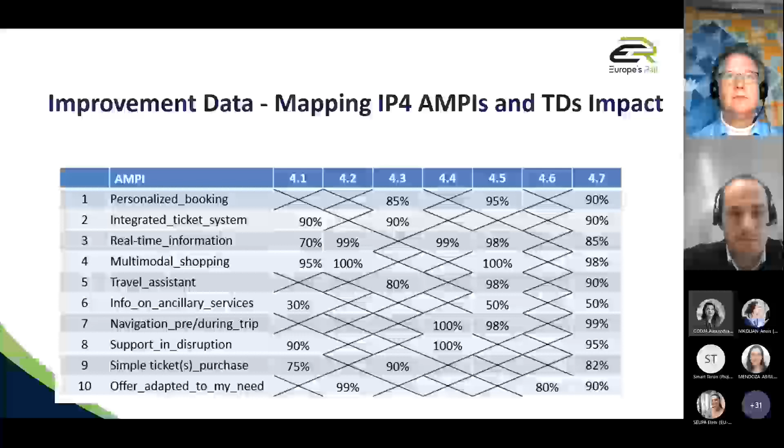On this chart you can see the 2022 improvement values. At the beginning of this presentation I said customer experience would reach 100% by the end of Shift2Rail's project, but it's obviously not 100% yet, because the improvement values were gathered during August 2022, and several projects weren't completed at that point - some will only be completed mid-2023. So some of these data are still below 100%, but that's fine, it's not an issue.

So as of now, the customer experience has improved by 30% if you take into account all AMPIs, even the ones that do not relate to Shift2Rail, because customer experience may also be impacted by factors unrelated to Shift2Rail's innovation. If we only focus on Shift2Rail's projects, then customer experience has improved by 60% at this point in time. And for IP4 specifically, the AMPIs that relate to IP4 have already reached 90%.

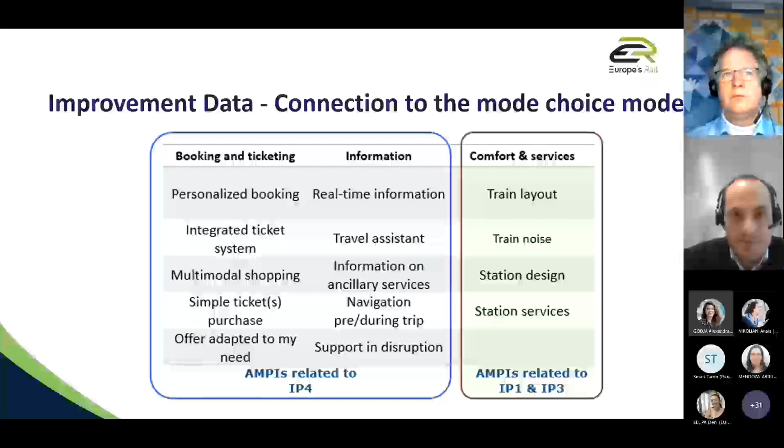As a conclusion, the customer experience model allows us to fill a gap that was assessed at the beginning of the Impact 2 project, which was about the demand side, because the previous models focused on the supply side, the infrastructure manager and railway undertakings point of view, while the demand side, the improvement for customers as individuals, was missing from the picture. So this was a gap that has been filled by the customer experience model.

The next step would be benchmarking with similar models made for other industries. As with our previous contact, we were surprised to discover that, as far as we know, there is no such model that has been developed, for instance, in Clean Sky or in other JUs. We were willing to bridge the gap and get in touch with stakeholders from these industries, but either they were not willing to share their models, or these models simply do not exist so far.